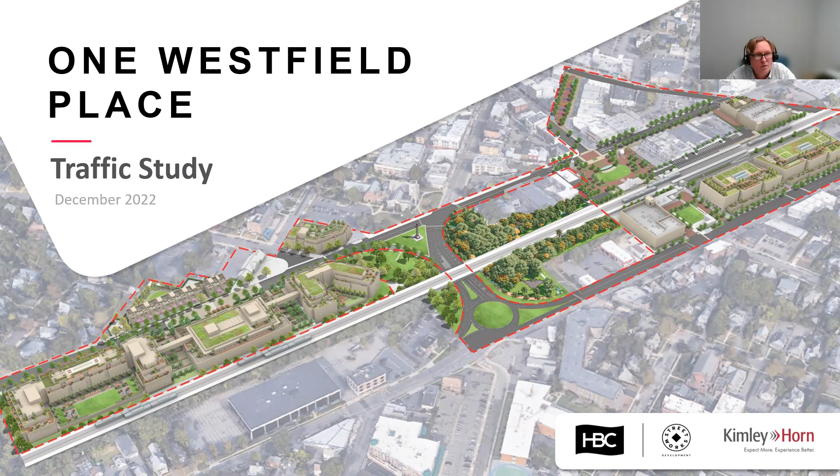So tonight we're here basically to discuss traffic. That's the issue at hand. We're seeking public input. This is the fourth public presentation that we've had. The three others were live. We received a lot of good input from those, and we'll be addressing some of the comments tonight and some of the comments we're still working on.

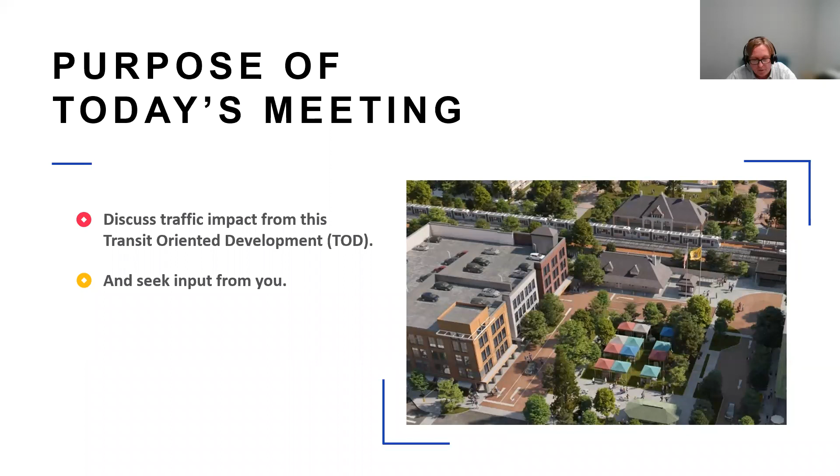Lisa, if you can advance to the next slide, please. We do want to seek input from you. It's a collaborative process. Next slide, Lisa, please.

The purpose of the redevelopment is to repurpose the train station area in order to support the downtown. It presents opportunities to improve the town's transportation infrastructure. It also presents opportunities to provide a healthier downtown environment for a healthier lifestyle. Lisa, thank you.

Many of you may know that the town has not had the opportunity to invest significantly in transportation infrastructure over the years, and yet traffic volumes have continued to increase and change. And as a result, you have a lack of equipment at certain locations and antiquated equipment at other locations, so that traffic operating conditions in the downtown are not as efficient and not as safe as they could have been.

But the town hasn't been sitting on its hands. It has conducted extensive traffic studies, as John referred to, and has evaluated conditions where there are challenges and where there are opportunities. So this project is going to build on those studies. And one of the recommendations was to have a transit-oriented multi-use development.

The benefits of this are you get the support and the investment from a development with less traffic, more walking, and it's more efficient. It allows to provide pedestrian and safety improvements as well as capacity improvements, to update the traffic signal equipment, and to provide an overall safer and more efficient transportation network.

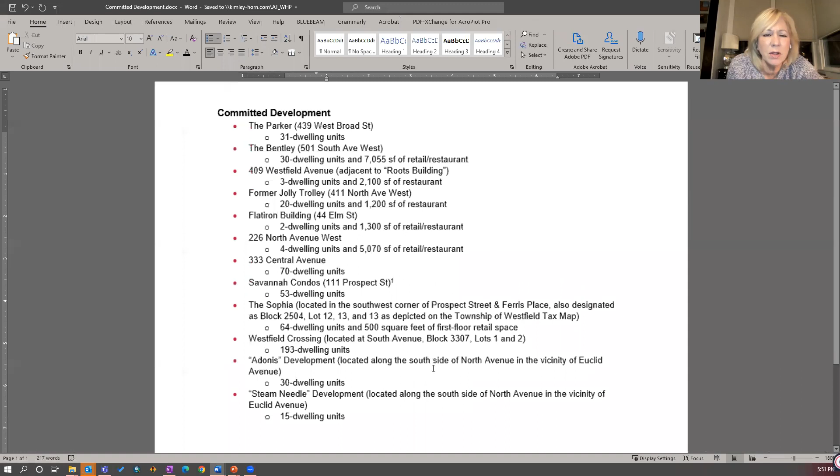So you looked at all of this. All of these developments have been included in the traffic study. Part of them have been incorporated from the land use plan because they were included in the traffic projections from that, but all of these projects have been included. And on top of that, we have an increase in background traffic as well.

Got it. So the new ones I think people will be most interested in, since a lot of these are more recently built and completed, are the Sophia Westfield crossing and the North Avenue project. I think that's important for people to understand. Thank you, that's very helpful.

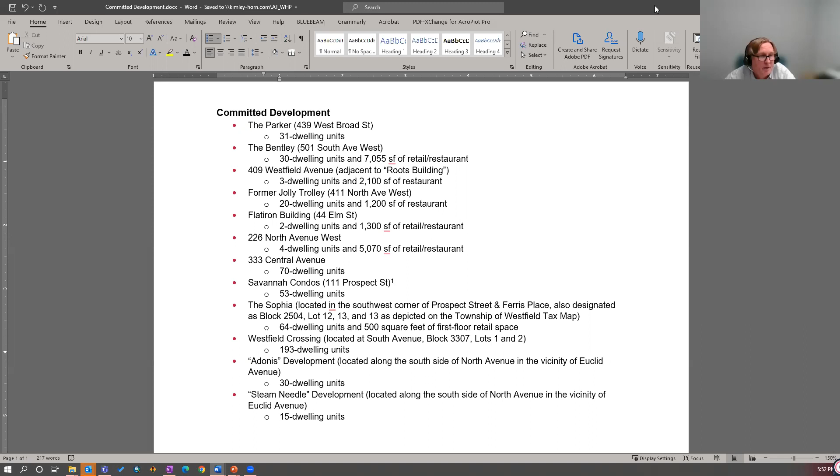Thank you, and that's absolutely part of the process. We expect that people would ask questions like that. That's something we worked closely with the site owner, with John, to make sure those were in there, and to work with the town planner and town administrator to make sure we had the right numbers, and then convey that over to make sure it was incorporated into the study.

John, Federico, you might get into this, but the number of intersections that you all weighed in on from WSP - can you talk a little bit about what intersections were determined and why, and what role you played in expanding that?

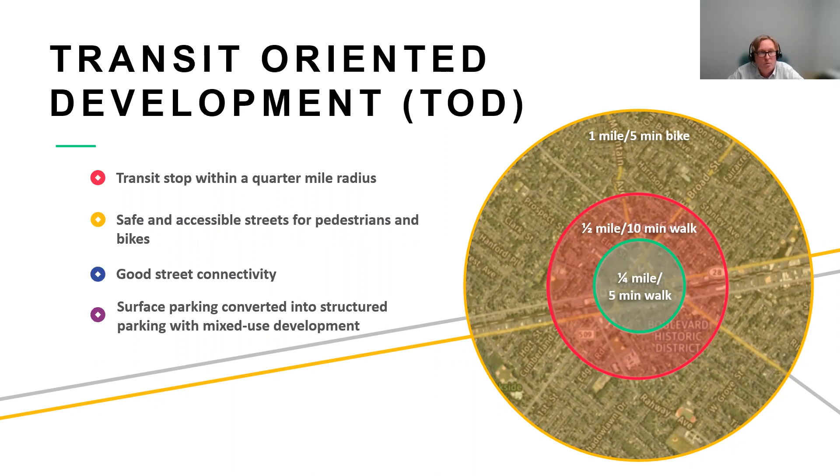Sorry to interrupt you, but I think this was some of the slides that caused a little bit of confusion during our sessions.

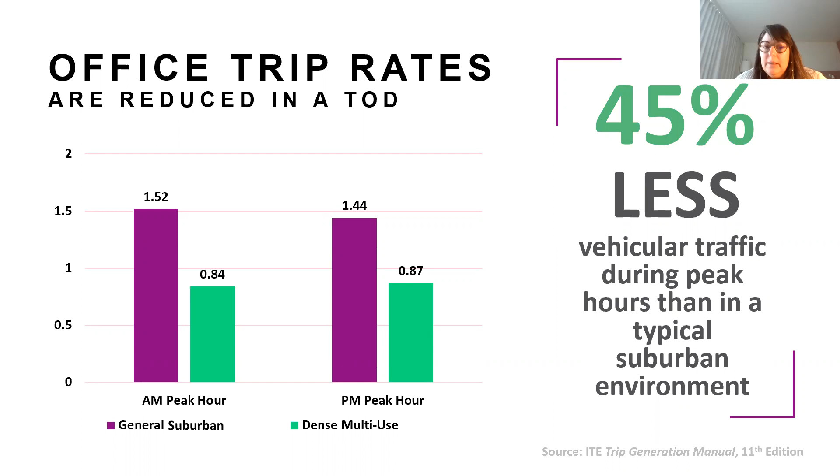Yep, so just to clarify, this slide is just the trip generation, and the source is coming from the Institute of Transportation Engineers and from their trip generation manual. This is not the measure of our development, so just wanted to clarify that for folks.

There was some discussion on this, so we took it up and rechecked the numbers. One interesting thing we found: 90% of the purple data was taken before 2009, the start of the Great Recession, and 80% of the green data was taken after 2009, after the Great Recession. There's been quite a transformation in traffic generation at office buildings pre and post the Great Recession—afterward, there was much more flexibility in work times. You didn't have to be there at 8:30 and leave at 5:30; you had the ability to arrive earlier or later. Based on the data we have, this has played a part in showing a difference between trip generation for office development in a transit-scarce environment versus a transit-rich environment. We rechecked with the town and confirmed we used the appropriate trip generation rates.

We also checked transit ridership, carpooling, and the like at the trip generation, and determined that for Union County and for this development, approximately 70% of office workers are expected to drive, and approximately 30% are expected to either take the train, walk, bike, or carpool.

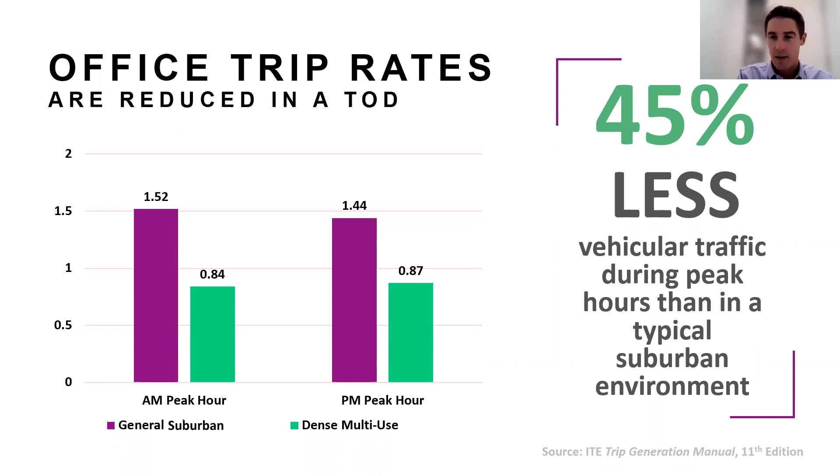Let's not look at this historical comparison - what we see is the 70%. That's clear when we go to the ITE platform and look at what's going to transit, walking and biking, versus what's going to driving. It's more like a 70-75% to 25-30% split. So the driving is the 70%. Yeah, thank you.

In addition to reducing the amount of traffic generated per square foot, TOD has other benefits. It puts employees in offices closer to your downtown to support your downtown, particularly during the lunch hour but also in the after-work periods. This provides for a more sustainable downtown, which in turn results in increased property values. TOD also allows investment in infrastructure that makes for safer walking and driving, and provides more healthy modal choices and opportunities. So overall, TOD is a more sustainable development from a traffic, pollution, and safety perspective.

One of the critical elements in determining what goes into a TOD is the use components. The proposed development consists of 3 uses: office, residential, and retail, carefully selected to consider their benefits and impacts on the downtown. One of the more significant components from a traffic perspective is the office component. There will be approximately 210,000 square feet of office space over the existing municipal garages in the south zone by the train station, plus approximately 100,000 square feet of office space in the former Lord and Taylor building, which I'm told is ideally suited to conversion from retail to office. In addition, there will be a substantial amount of the residential program located on either side of the Lord and Taylor building.

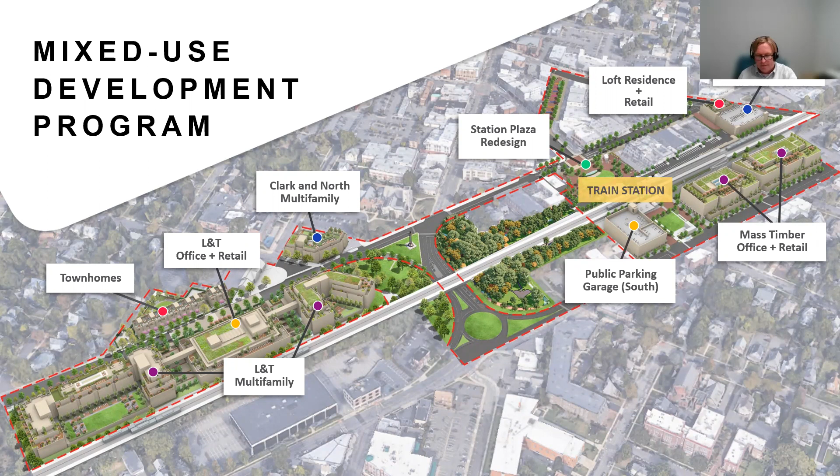Next slide, Lisa, please.

Again, we're looking at your perspective, what you will see traveling through the intersections. When you drive through town, it'll take you probably a minute to get through the intersections on average. So we looked at the trip projections per hour, divided them by 60, and looked at how much traffic would be added at the various zones. If you look at the Lord and Taylor zone, the west zone, on average that's going to generate 3 new trips per minute entering and exiting at that location, and then they'll distribute through the area intersections in the study area. If you multiply 3 by 60, you can see it's almost 200 trips per hour. So it's not a small amount, but on a person scale, it's really not that significant.

If you go to the south zone, where the office and a small amount of retail is, it's an additional 4 new trips per minute. Multiply that by 60, that's 240, 250 trips per hour. And then in the north zone, it's approximately 1 new trip per minute.

And in total, John, that's— yep, sorry John, if you could explain for folks that these are your outputs, right? But they will be influenced by the delays, will be influenced by the traffic mitigations, right? So there's no doubt that there are trips being added. Can you talk a little bit about that, John?

Sure. So there's no question that there's traffic being added, and if you add these up—3, 1, and 4—it's an average of 8 trips per minute during the PM peak hour, which is the busiest of the peak hours. But there's a couple of other factors at play. First, as a point of reference, we looked at the trip generation associated with the existing municipal lots on the north side and south side of the train station. On the south side, the municipal lots, including drop-off and pickup activity, generate on average today—well, I should say COVID adjusted, because we did adjust our existing volumes to pre-COVID—on average 4 trips per minute. So about the same as what is proposed to be generated by the south zone. The south zone will be 4 trips on top of 4 trips, but I'll get to that in a little bit. On the north zone, the parking at that location, plus drop off and pick up activity, plus the traffic generated by the small amount of private commercial development up there, averaged 3.5 trips per minute during the peak hour.

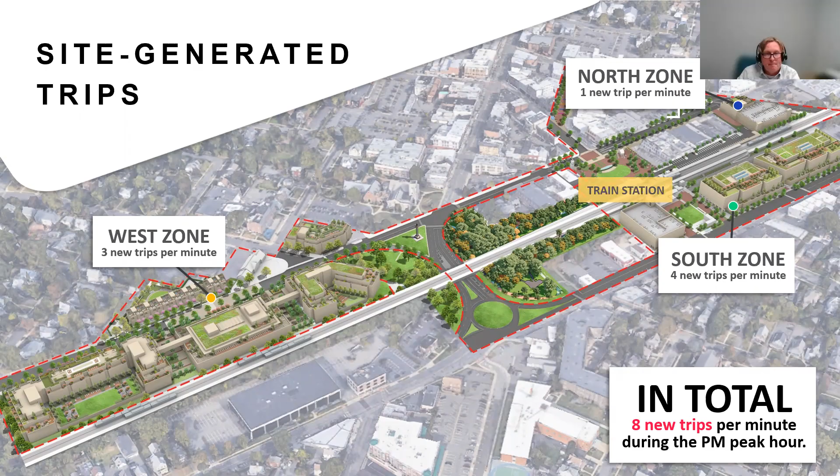So these are the study intersections we looked at, 17 in all. We also studied the site driveways, but to keep it simple we focused on the key intersections, because driveway delays are typically confined to the residents and are of lesser concern. They're in the traffic study for everybody to look at, up and down North Avenue, Central Avenue, and Broad Street. And then we show the development parcels highlighted here to provide some context.

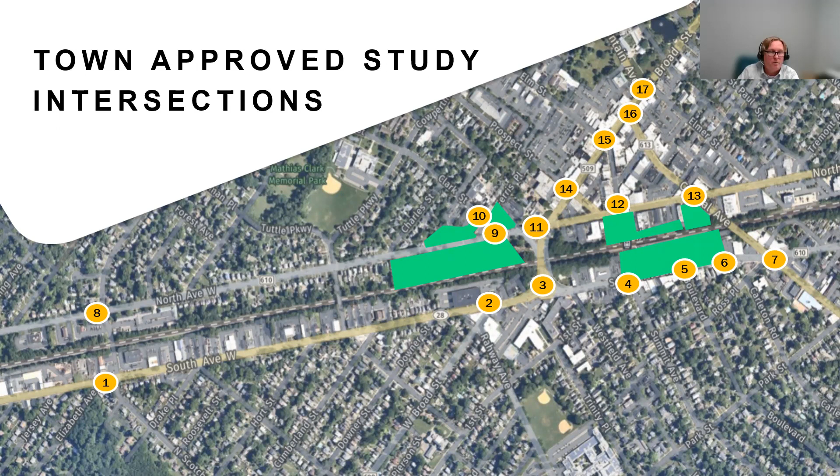Just a quick reminder, on one of the early slides we talked about the average number of vehicles passing through the intersection in the average minute of the peak hour. Existing conditions are about 31, future conditions with a vacant Lord and Taylor are about 33, future conditions with Lord and Taylor reoccupied are 34, and future conditions with the proposed project are 35. That's a net increase from A to B, comparing the project's impact at 2.9%.

So I think it's important to put this in context. We're acknowledging without doubt that there will be an increase in traffic, but it's not an order of magnitude or overwhelming increase. It's a modest increase, and we've studied its impacts. We've identified potential impacts, and we've also identified mitigation measures.

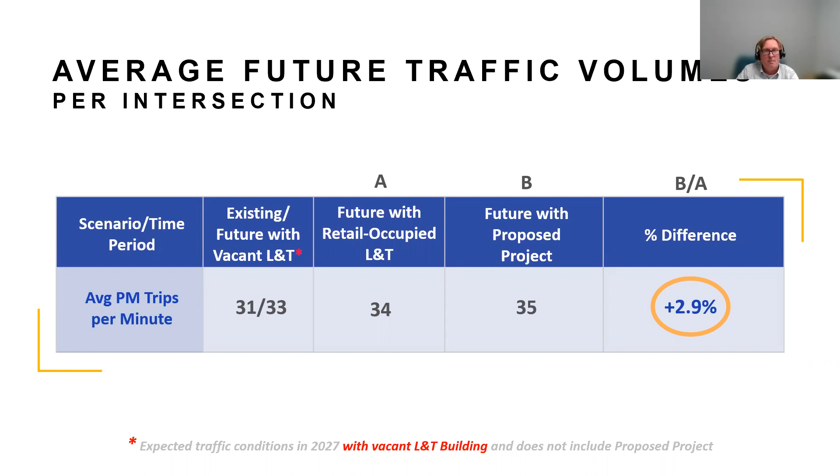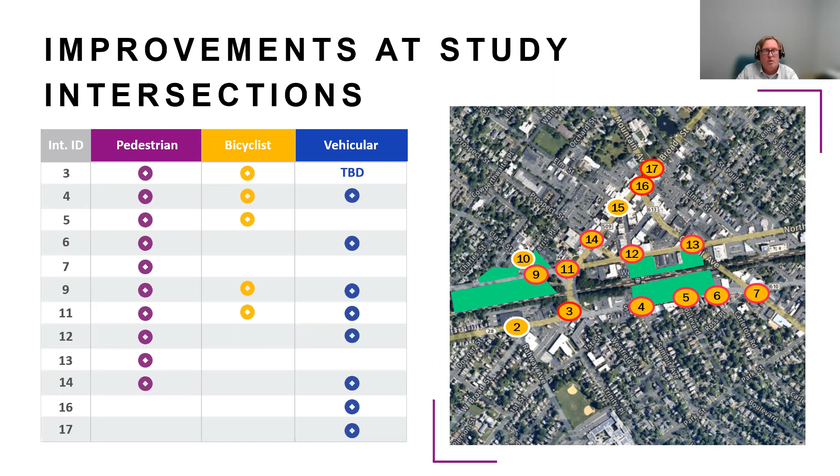Thanks, Lisa. So we've proposed traffic improvement measures at 12 of the 17 intersections. These improvements include capacity increasing measures, traffic safety measures, measures to improve the pedestrian environment, as well as measures to improve the cycling environment. We'll walk you through some of the key ones in the following slides.

This is the intersection of Clark Street with North Avenue. Today it's an unsignalized intersection. Because of that, vehicles exiting Clark Street have to wait for an extended period during peak hours for a gap in traffic to occur on North Avenue before they can turn out, particularly to make a left turn. As a result, you get very lengthy delays on Clark Street waiting to get onto North Avenue.

It's also very difficult for pedestrians to cross North Avenue at this location, because in addition to waiting for a gap in the traffic on North Avenue when they're crossing, they have to make sure that somebody isn't turning out of Clark Street and is anxious to get out onto North Avenue because they've been waiting for a long time as well. So John, pause here for a moment.

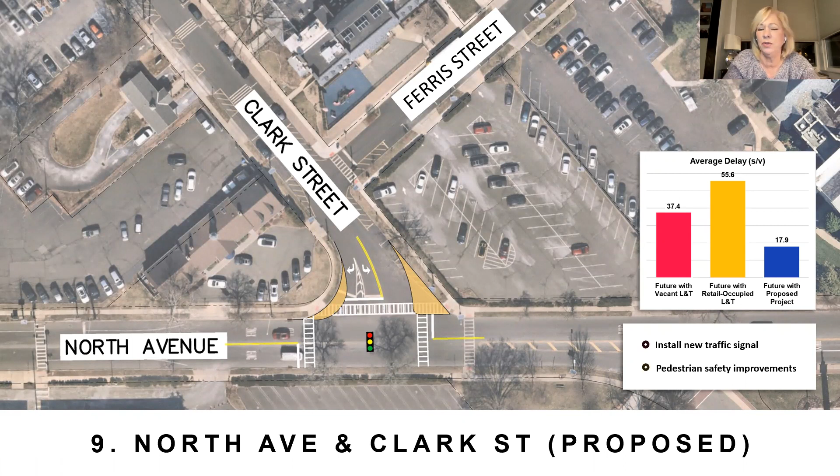So things like that look small, but they're really significant in terms of enhancing pedestrian safety. And I would add vehicle safety to that too, for people driving, because a lot of people are driving through these intersections, and you don't want to take extra time. You also don't want to get in a car crash. That's even worse. So making sure people can drive safely around Westfield and aren't putting their lives at risk at these places is just as important.

So when we look at this, we look at delay and operations, but we also want to create a safe roadway environment where people can make turns and get around town without having to risk their life to do that. And it also improves pedestrian connectivity.

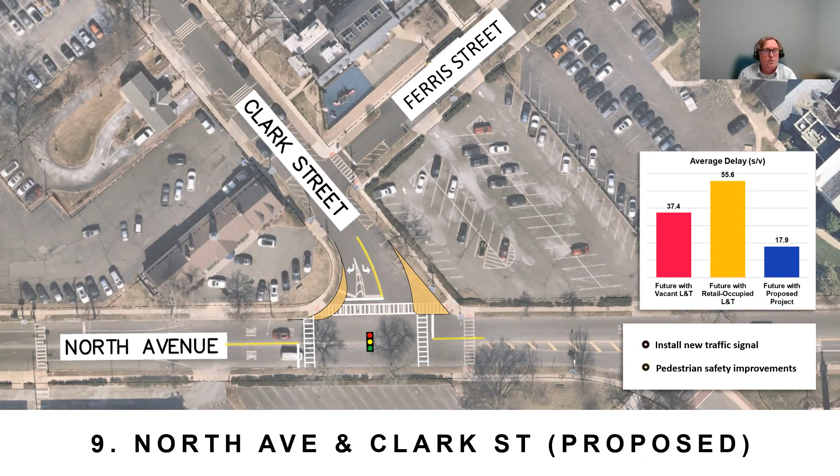There may be people who could come down Clark now and want to go south under the bridge, but it's like, oh, it's too much of a hassle to get there. Now they can come down and cross under signal control and go down. You'll see this at other locations as well, strengthening the connections of the existing pedestrian infrastructure.

The next location is the intersection of East Broad and Prospect. It's a similar condition, unsignalized now. There's lengthy delays on Prospect Street, and pedestrians crossing East Broad have to wait for a gap in traffic and then cross, hoping they're not in conflict with people turning off Prospect Street. So similar improvements at this location.

It's proposed to install a traffic signal and curb bump outs, and the analysis indicates there are lengthy delays on Prospect Street now trying to access Broad. The overall intersection delay will be reduced significantly, because delays on Prospect Street will probably go down from 147 seconds to the order of 30 or 40 seconds. Delays on East Broad Street will be minimized by signal coordination, and details on specific movements and time of day are provided in the detailed traffic study tables.

This is also a safety improvement, with people trying to cross the road and not being able to find gaps, cars blocking the crosswalk as they turned out of Prospect onto Broad, cars just trying to turn onto the street. We saw a lot of safety issues.

I also want to note that during the master planning effort, we analyzed crash data. We mapped those crashes and identified safety locations for all modes. That was part of this effort, developing mitigations that would address those safety concerns.

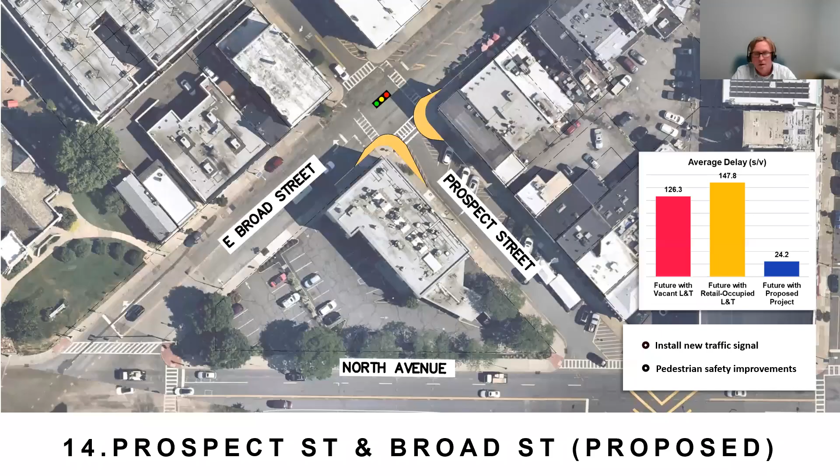Our conclusion was that the only way to make this intersection work is to make it a standard four-way intersection where motorists understand what to expect when they come to it.

We're also proposing to install a new traffic signal, new pedestrian signal equipment, and at all of the intersections close to the train station, we're proposing what's known as a lead pedestrian interval.

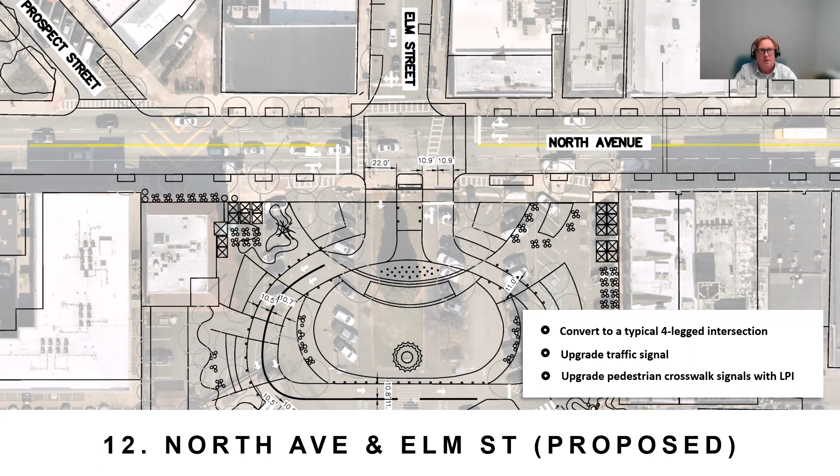Basically, before the light goes green on the street next to you, you'll get a walk indication, and the pedestrian will have an opportunity of 3 or 4 seconds to step out into the crosswalk and establish their presence, and the person waiting to turn will just have to wait. These lead pedestrian intervals have been shown to be very effective at improving pedestrian safety, and it's a feature we're proposing at all of the intersections close to the train station.

With these measures, the overall delay is projected to increase in the middle there from 14.3 to 14.5 seconds. I've said it before, I'll say it again, these analyses are preliminary and will probably change a little bit. But overall the takeaway is that with these significant safety improvements, this intersection can operate with generally the same level of delay as it does today. So from a delay perspective, there's no impact, but from a safety perspective, there'd be significant improvement.

There's also, John, proposed—I think the one thing you'd achieve universal consensus on in town is that intersection as it sits today is a disaster. Yes, and we're also going to like fix that. Remind everybody it's a state road. It's like, they did that. It's a disaster and very unsafe.

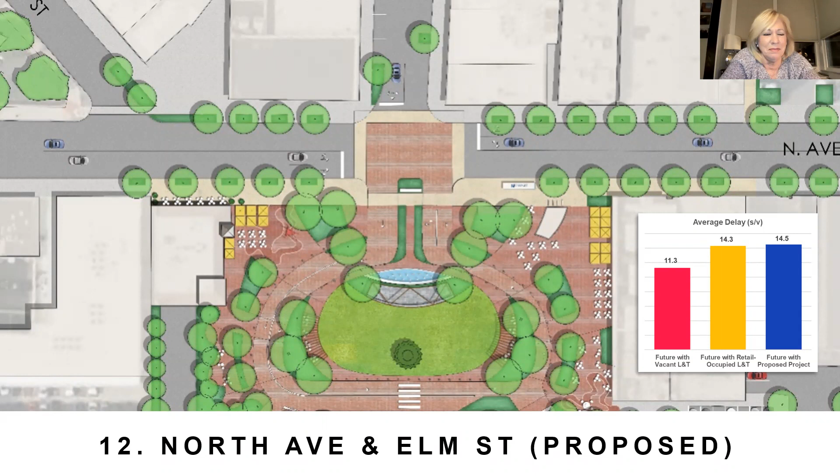We did note when we were out there that there are no pedestrian signals, so it's a safety issue today for pedestrians to cross. Based on our analysis in the traffic study, and we're looking for public input on this, we've determined that the proposed increase in delay with the improvements at this intersection, from 34 to 38 seconds, is worth the benefit of the safety improvements, which include installing pedestrian signals, upgrading the ADA curb ramps, and installing high visibility pedestrian crosswalks.

Hey John, can you just describe when you say pedestrian signals, a lot of people might not realize what that means? Can you describe what a pedestrian signal is? They think it's just pushing the button and it goes, but it's more than that.

Well, it's more than that. These will be APS, accessible pedestrian signals, for both those who have good vision and those who are sight impaired. The buttons issue a click so that if you can't see them, you can hear them. When you press the button, it tells you to wait, and then when the light changes, it tells you in which direction to cross the street. For those who are able to see, you'll have a clear indication as to when you should walk and when you shouldn't. They'll also have countdown signals to tell you to hurry up to finish crossing, or not to start at all. So those are the pedestrian improvements: push buttons, signals, signal indications, and the audible pedestrian component, so that if you're sight impaired, you'll have a much safer crossing environment. You'll know which street is going at the time and when you should cross.

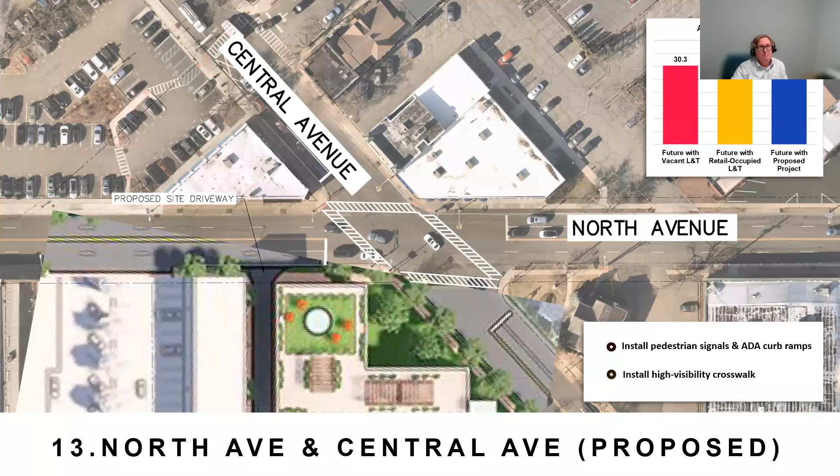It's once again something that will have to go through a review process with DOT, because it's along their road and so close to that intersection. The good thing about this is that there's a great degree of stacking potentially. Let's say the town is hosting a concert and everybody's leaving at the same time—there's a great amount of stacking and vehicles queuing that can happen without hitting the road at all, within the site, correct? Yeah, absolutely.

So the next slide shows a bit about the bicycle improvements. One of the challenges identified by the walk-bike study the town conducted was that the existing 8-foot pedestrian and bicycle underpass under the railroad was not particularly comfortable or wide enough to accommodate both pedestrians and cyclists at the same time. The recommendation was that it be widened from 8 feet to 14 feet, so it is proposed to widen it and improve the connections to the existing sidewalks and bike trails at that location.

We're also going to work with New Jersey DOT to look at the roundabout. I know they made some changes to that location about 8-10 years ago, and we want to confirm with them that they're satisfied. We've identified that the southbound approach from under the railroad onto the roundabout is problematic from a safety perspective, and we'd like to discuss that with them, along with pedestrian connectivity across the roundabout, particularly the west side. There's a traffic signal that allows pedestrians to cross on the east side.

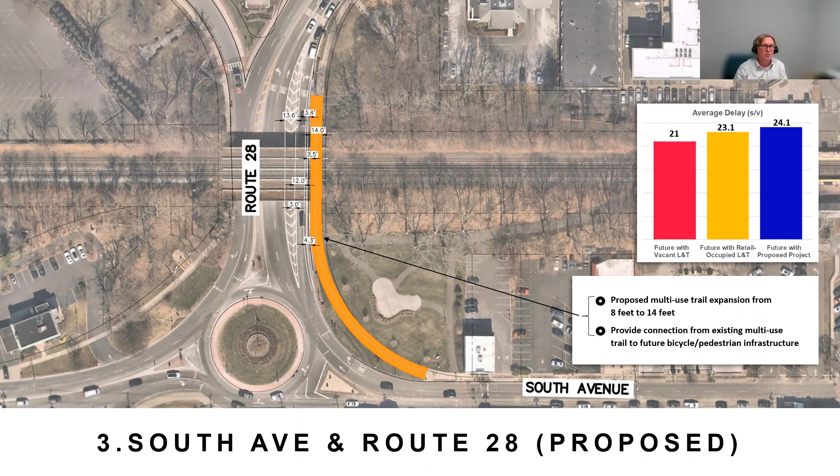From an average delay perspective, the chart on the right shows the overall delay during the PM peak hour for the roundabout will be 23.1 seconds with a retail-based Lord and Taylor building, and that would increase to 24.1 seconds with the project.

I'd just add to that last slide that it highlights how important connectivity is for walking and biking, and that to really achieve any of that mode share where people aren't just driving, it's in the town's interest to improve walking and biking in these areas to the greatest degree possible, making those the most comfortable and safe connections. That's what's important about these types of projects. Yes, it's a holistic view.

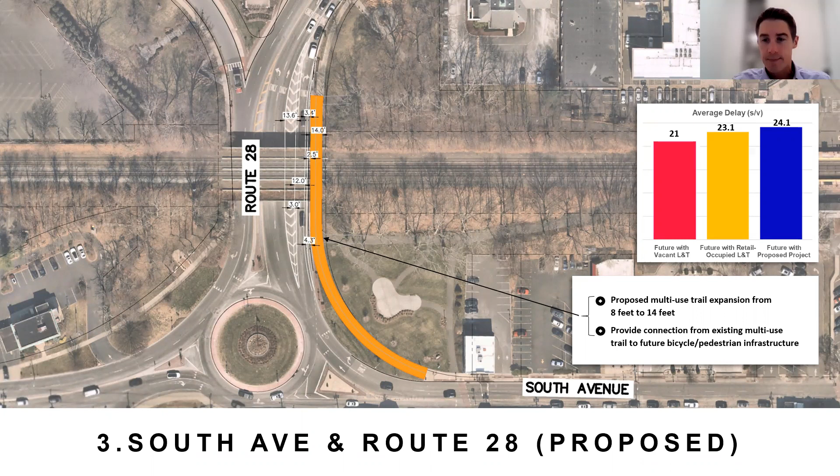Overall, in adjusting the signal timing, we've tried to minimize increases in delay, or show no increases in delay, on the eastbound South Avenue right turn movement to Central Avenue, and on the northbound left turn movement from Central Avenue onto westbound South Avenue, as we want to encourage motorists of the development to use those movements and not discourage them with lengthy delays, causing them to seek alternative routes.

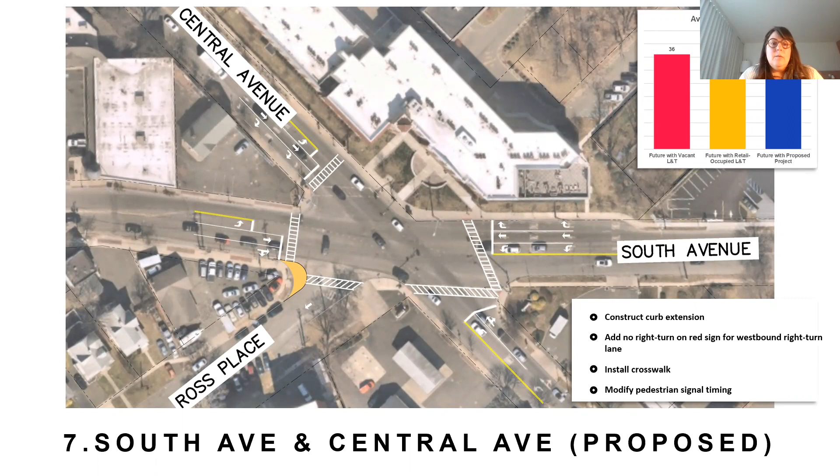I'm sorry, Carolina. Mayor Brindo, I think it's important to emphasize to the public that because of the pilot duration of over 30 years, the town will have the opportunity to constantly be revisiting its infrastructure beyond 2027, correct? And so other improvements that might be outside of the vicinity here will definitely be something that the town will be constantly monitoring moving forward. If you can speak a little bit to that.

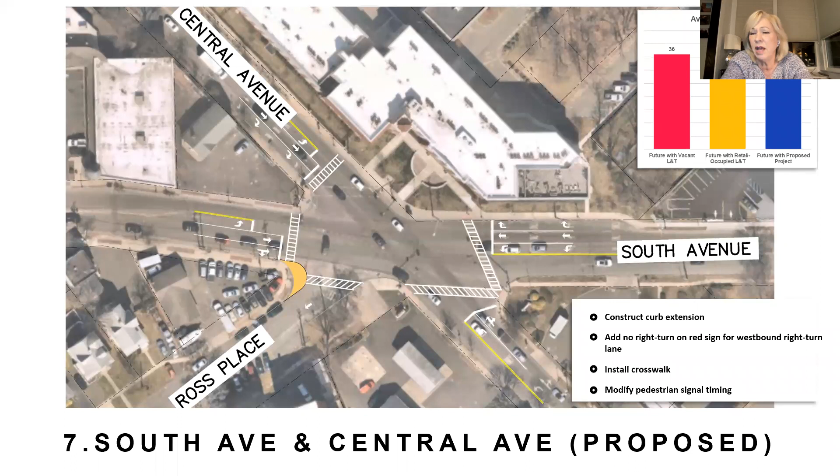Yeah, well, of course, I think that's absolutely something that we would attempt to do for sure. One other question that has come up, more of a concern raised by neighbors on the south side, in particular like Boulevard and Summit, which tend to be throughways. I think there's a concern, especially if traffic is going to back up. Are Boulevard and Summit and those streets going to become cut-through streets from people off of Central trying to access the office buildings? Do you see that happening, and if so, what can we do about it?

So as I mentioned previously, we have proposed traffic signal timing changes that will minimize the increase in delays on the eastbound right turn and the northbound left turn movement. The purpose of that is so that people will not divert onto Summit and Boulevard. We would suggest that as the project develops, we consider whether there would be additional measures that we could implement, perhaps traffic calming measures on those streets, such as speed humps or bike lanes that would further discourage motorists from going down Summit and Boulevard.

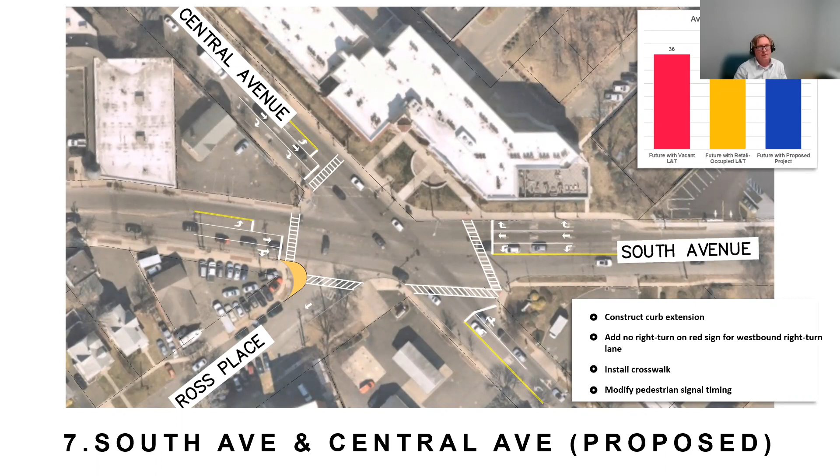But we're providing the infrastructure with the capacity to accommodate project traffic at the intersection of South and Central. That's the primary focus of the improvements at this location.

Right, correct. I would echo that it's a two-pronged approach. You want to keep the main traffic on the arterials and the larger roadways by making sure the operations are working on those roads. But you want to pair that with making sure you can also put some traffic calming on those streets if you anticipate any kind of diversion.

And to that end, in the bike walk plan, we had Summit and Boulevard in the bicycle network as great potential routes for bike routes to the station, so that people from the south neighborhoods would have better access to the train station area and the amenities downtown.

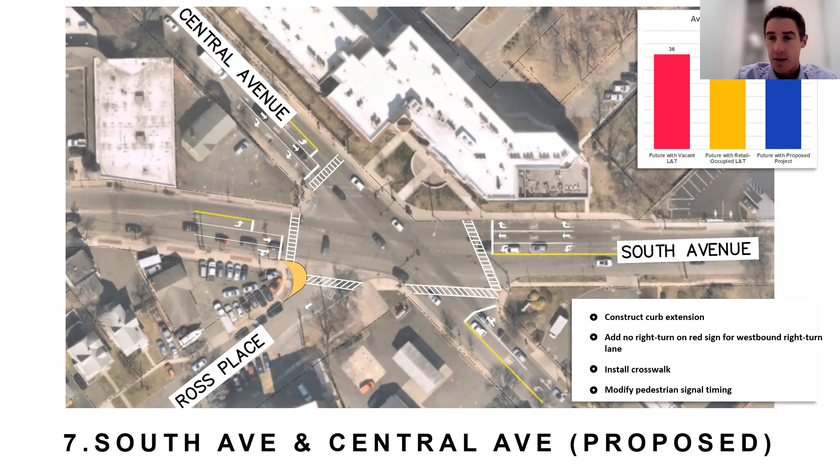And so just by virtue of adding bike lanes on Boulevard and Summit, that helps as a traffic calming measure, because it helps narrow the roadway, kind of redefine it so it doesn't seem as wide. That paired with intersection treatments and other traffic calming measures could work holistically to address any concerns about cut-through traffic.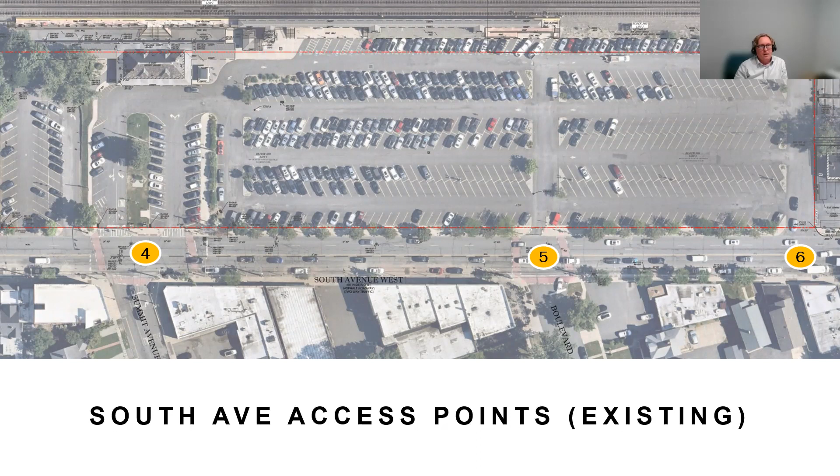So it's proposed to improve the operations at this intersection by reconfiguring the intersection of Summit Avenue with the train station. So it's a traditional four-way intersection. We can run the northbound and southbound movements at the same time, which will provide increased capacity.

We can move the stop line up a little bit to get back a second. We're proposing to implement lead pedestrian interval crossings at that location. It'll be a new traffic signal with improved detection and coordination.

We're also proposing to install a traffic signal at the east end of the development at location number 6, which will provide a signalized crossing at that location and guaranteed access to South Avenue coming out of the train station. I think it's important to note that access to the facilities, parking garages, will be on the back or the top side of the page. So there will be no activity from the development's parking coming out directly onto the street.

It's also proposed to close off the exit from the train station parking lot that comes out opposite Boulevard and tighten up that location so that it will be easier for pedestrians to cross a shorter distance, and pedestrians will no longer have to contend with 2 lanes of westbound traffic.

In reviewing this at previous public comment meetings, residents expressed concern that the new parking on westbound South Avenue, as well as the elimination of 1 lane, will lead to increased delays because motorists will be either parking or waiting to turn left. We're looking at the possibility of providing left turn lanes potentially. There's not a lot of left turners now, but it's definitely something we're looking into.

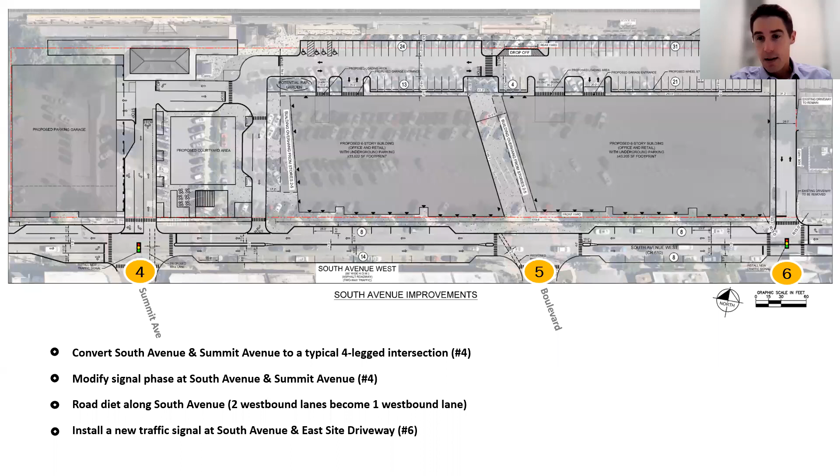And John Federico, I don't know if you wanted to comment here. Yeah, I wanted to add a couple things. It's important to note east of here, coming from central and south, that intersection, there's 1 westbound lane into this area. The challenge I've seen in a lot of road diet projects is when you have 2 lanes going in a direction and then you try to road diet down to 1, there's that merge point, and you either have to drop a lane or you have to merge, and that can create a lot of congestion.

But entering here, you only have 1 lane that opens up into 2. So when you bring it down to 1, it's 1 lane through. You don't have that merge issue, and that makes it a lot more workable from a road diet perspective. That's coupled with, as John Canning mentioned, improvements at Summit Avenue in terms of the operations and getting rid of the split phase. Those together with the other signal are really what makes, and having slightly lower volumes here than on North Avenue, what makes a road diet on this road more feasible.

Let me just say one thing about road diets, because I remember the first time I heard that term, I thought that was really odd. When you think about it, it's essentially narrowing the road, and when you provide even visual cues for narrowing the road, it's an automatic kind of incentive to slow down.

I think the thing that's always been so troublesome on South Avenue, which is why that boulevard flashing beacon isn't necessarily so effective, is, as John had already said, when traffic is going, and if you stop for a pedestrian, the vehicle behind that car will go around to try to pass it, and that's causing pedestrian accidents. So part of the road diet is disabling that get-around lane to make sure it's safer for people who are walking, which would make the flashing beacon actually operate better in that location.

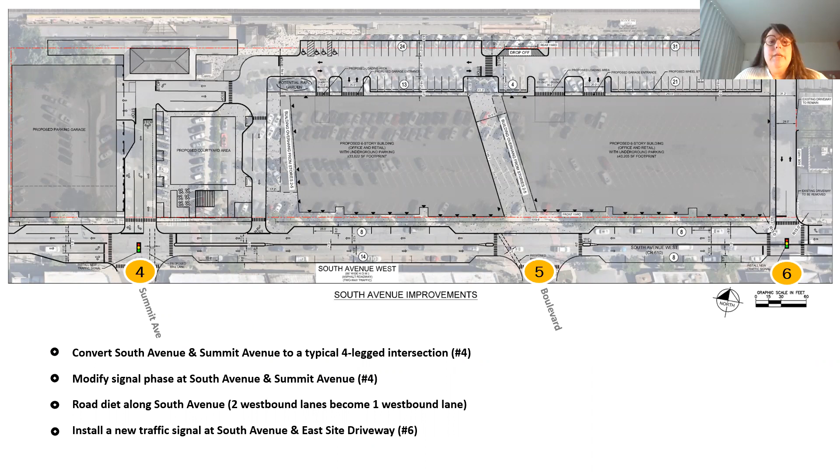In terms of those movements blocking the flow, you're going to have some instances where someone's making a maneuver, but in the overall scheme of things, it's not that many spaces, and that turnover isn't going to happen so frequently that it's perceptible as an issue. Most of the time, you're going to be passing a line of parked cars and not even notice. And the traffic signals will help establish that flow. Correct.

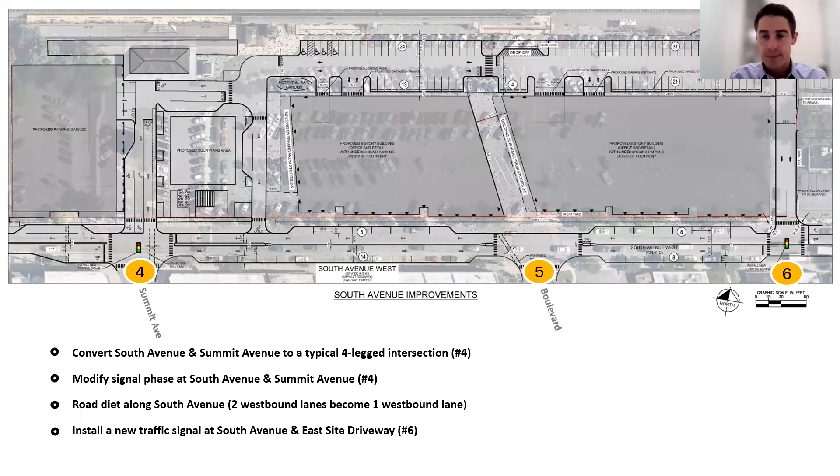On the next slide, this just shows you the levels of service. So on the left end, where there is a signal, the improvements proposed will reduce the overall delay from 18.8 seconds to 9.5 seconds, which is pretty considerable.

At Boulevard, the proposed changes eliminate the driveway that comes out and makes a right turn opposite Boulevard, because those movements conflict with the left turn, especially during the PM peak hour when people are leaving the train station. The analysis indicates the delay will be reduced from 40 seconds to 28 seconds. At the east end, the delay will be reduced from 22 seconds, which is on the driveway approach, to an overall delay of 6 seconds with the traffic signal. That's for the entire intersection.

Again, you get the benefits of signal coordination, and at Boulevard, you get the benefits of more gaps in the traffic flow because you've got the new intersection at location number 6.

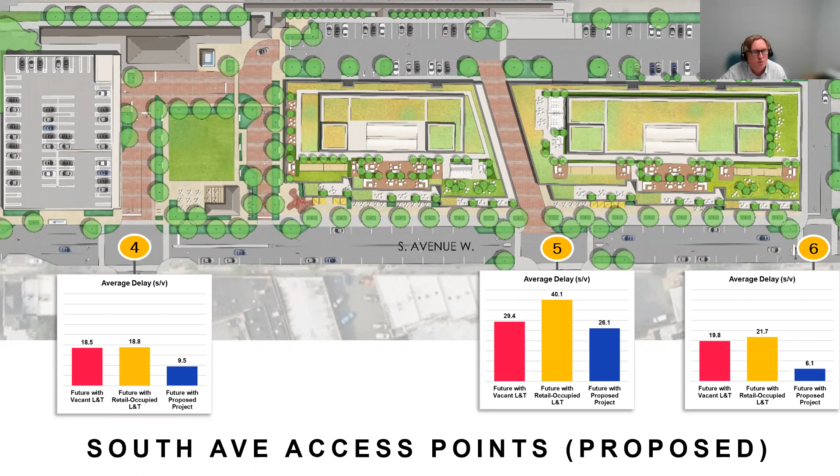Next slide, we'll try and run through this quickly. In addition to our standard engineering software, known as Synchro, where we compare traffic volumes to lane groups and green times, we're also using another format known as SimTraffic. This is a simulation of future traffic volumes that allows us to look at how the intersections will operate.

On the left side here is the intersection of East Broad Street with Mountain Avenue and Central Avenue, where we're proposing significant changes to the signal operation. On the left is a future no-build condition, on the right is a future build condition. For folks drawing a comparison to the bar charts, the no-build is the orange bar, and the build is the blue.

It's difficult to do a quantitative evaluation based on these simulations, but it does give you an indication as to how the intersections operate and where there might be problems. So we look at this to double check our analyses. If you want to go to the next slide.

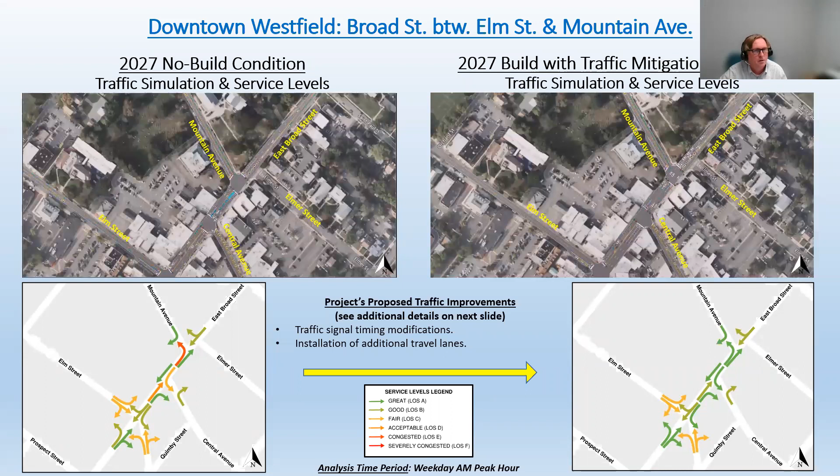Again, we can use it to help us look at the left turn delays and their impact. But overall, you can see that traffic operating conditions in the future are moving reasonably well, and that's the intended goal. It's not to speed traffic through Westfield, it's to get traffic through Westfield predictably, efficiently, smoothly, and safely.

For the public, the animations you see here and the traffic flows are outputs from the model, right? This is not someone animating something, it's true data that is animated, correct? Absolutely. There's a button or tab you click that takes all of the input data from the model and turns it from a static model into a dynamic simulation based on all of the algorithms. It's based on the actual data that were in the model.

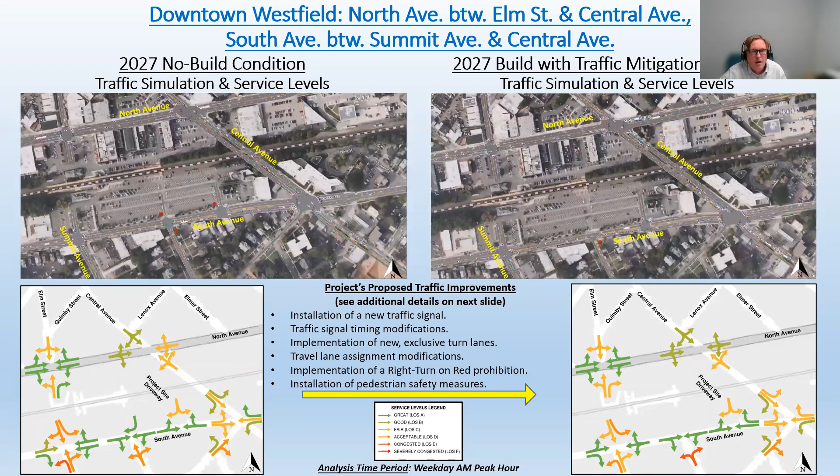And I think for the most part, those are the highlights of the traffic study. There's a lot in it. It's just been released, it will change. It's going to be reviewed again by WSP. It will be submitted to the town, the county, and New Jersey Transit.

I appreciate everybody's time. It's been an hour and a half listening to me, which is hard enough for me. I can't imagine what it's like for you. I look forward to comments from everybody, and we will be assimilating, compiling them, and responding to them as best we can. And the analysis will change over time.

So I'm going to hand it back to whoever's in charge at this point, and thank you very much for your time and attention. Thank you so much, John, for that thorough presentation. I'm just going to review some of the conversation, the questions that came in before this presentation. I think you had addressed many of them.

North and Central, what other developments were considered? Let's see, one, you've mentioned the traffic flow on Central and South and North, and what the high volume is.

I do think it's one thing to point to how many office employees are we expected to gain and how many are we expected to lose. I do think that's a really important point, because we keep talking about how the Lord & Taylor is gone and we lost the 143,000 square feet of retail and then all the cars and employees that came with that. But we've also, since 2015, lost 250 employees downtown that were working—for the last few years prior to 2015, employees that were living or working in second floor buildings in our downtown and parking all up and down Elm Street. And that's been a huge loss.